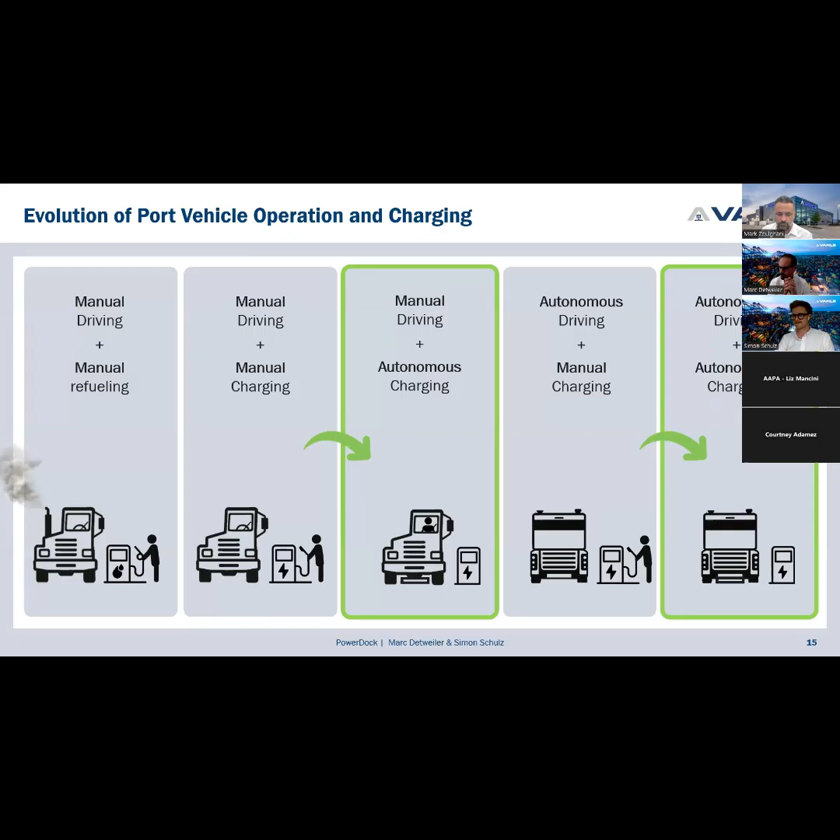So on the next slide, you see why we want to take this step, because manual charging can cause some problems. The problem is that when charging gets missed after a shift change, the vehicle isn't charged and is not ready to operate for the next shift. Very often, responsibility for charging is not clear.

With manual charging, we don't have a chance to make a so-called opportunity charging - in small idle periods or breaks, it's not possible to get out of the vehicle, plug the CCS2 gun into the car quickly, and then get back in the truck. We want a solution ready for opportunity charging. The manual CCS1 or CCS2 charging is not ready for automation, and for sure the operational inefficiencies with manual charging disrupt workflows and increase labor demands.

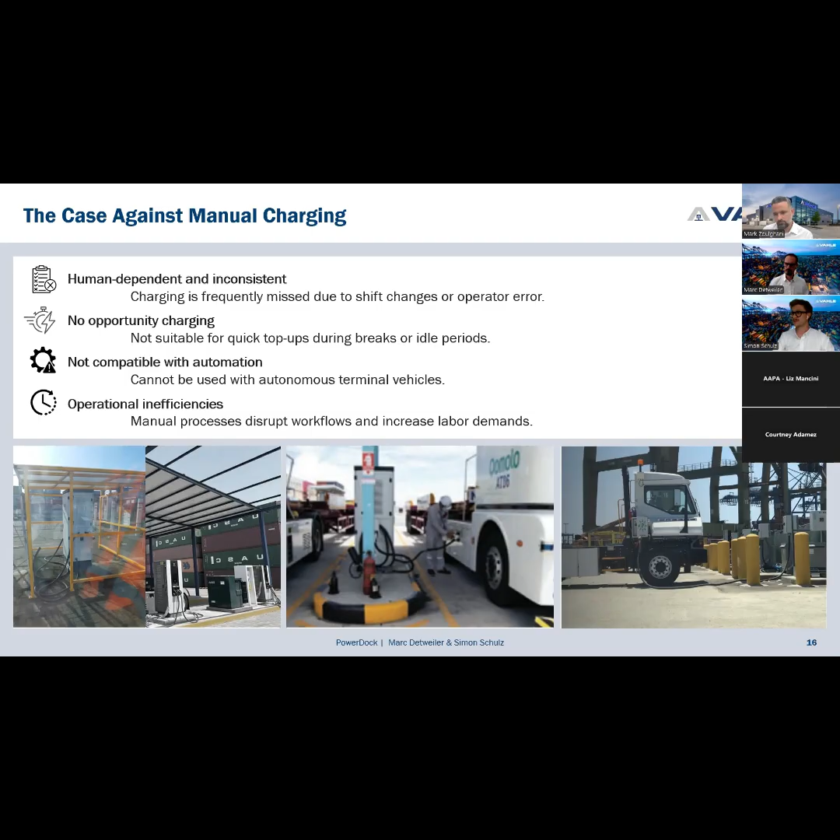On the next slide, I'm going to show you the system architecture of the system we are working on. From the very left, you can see number one, the DC charger, like any normal existing DC power charger. Number two, we have this tower where all our control units are housed. Number three, we have a base unit where we push a table up to charge a terminal truck or any other vehicle on the terminal through conductive contact - five conductive contacts.

On 4, you see wheel alignment guides. For the test phase, we need to use them just to be more precise on these pins. Then on number 5, there is a mobile unit.

I will show you later more detailed pictures of this receiver plate, which needs to be implemented on a terminal vehicle to pick up the power from the mobile unit. The grayed out things you see are clearly not our system, like the charger itself or the terminal truck, not delivered by us. The system which is in full color is numbers 2, 3, 4, and 5.

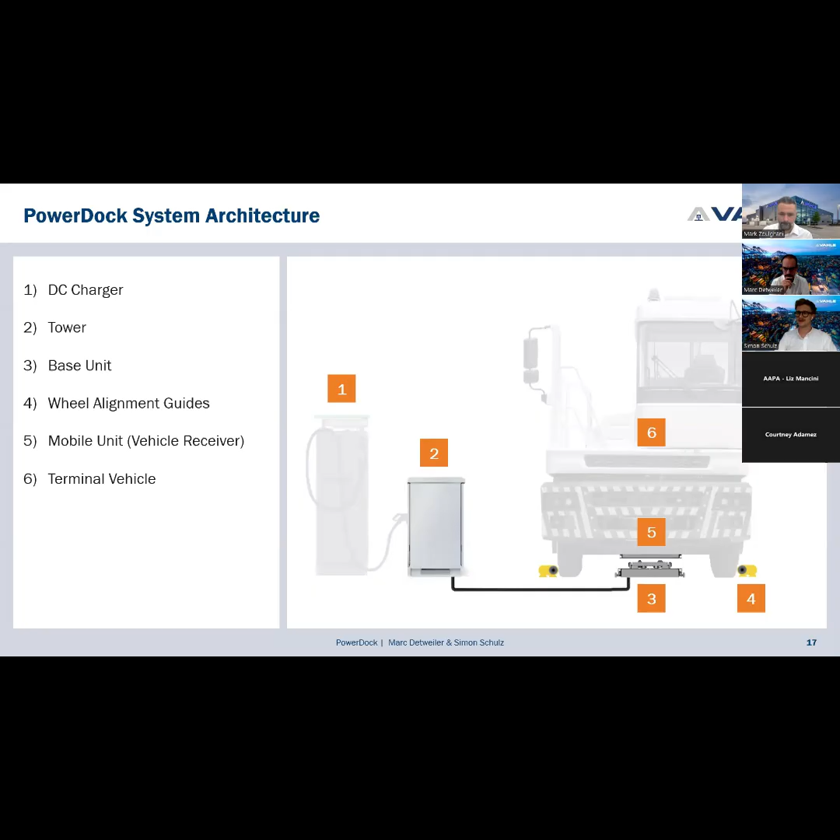On the next slide, I'm going to show you why we have chosen the charging option from the bottom. As we know, there are more systems on the market, not only in terminal operation but also in public transportation, where for example buses are charged from the top.

But for our system, we have seen that the bottom gives us universal compatibility, as more or less they are the same opportunities from the bottom - a terminal truck, a heavy forklift, an AGV, or a reach stacker are just having more or less the same technical circumstances from the bottom.

Also, because the design is very space efficient, I will talk later on a slide about it, that with this design from the bottom it should be possible in the future not only to have the charger on a specific parking lot, but also inside of a container aisle, for example. So also an argument for charging from the bottom is that we have the advantage that we can park the vehicle and just go over it again, implementing it into the daily process, and not have to start in a parking lot and go back to do any operation at the port.

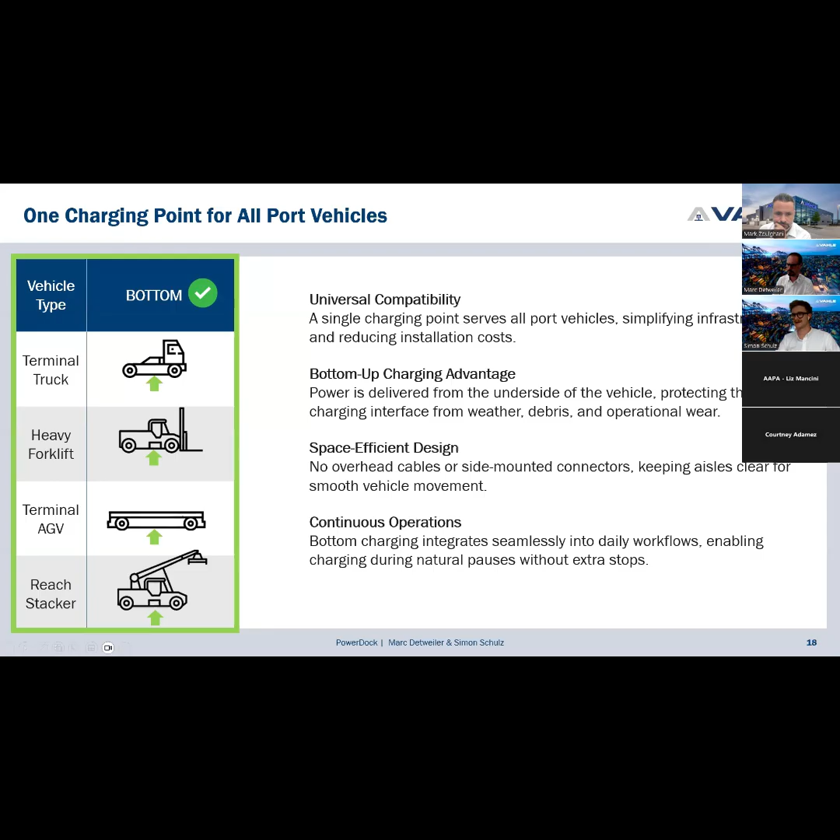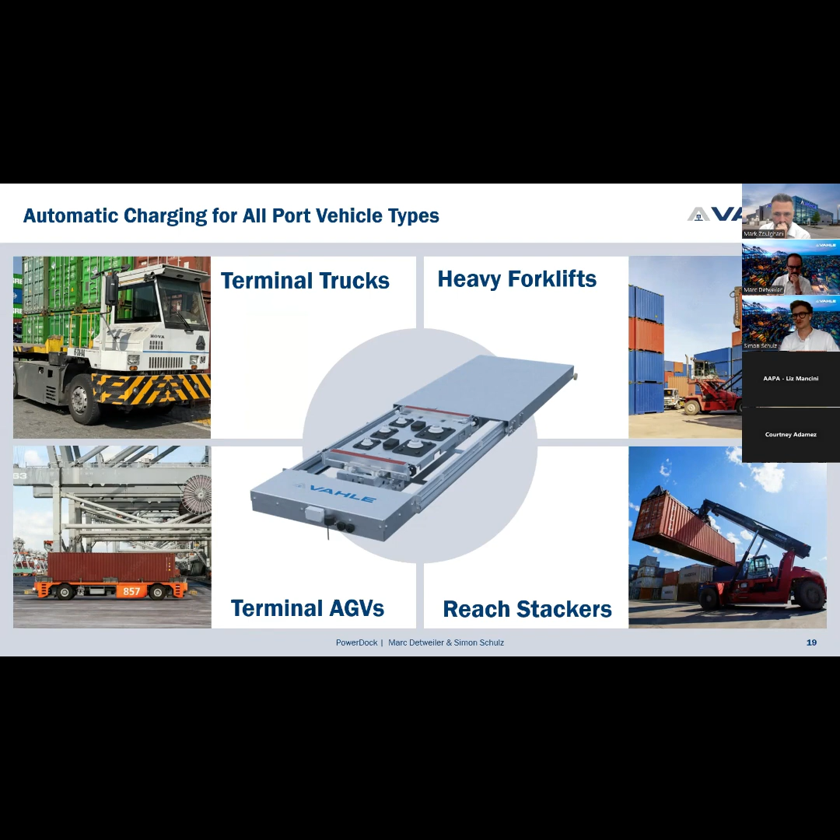Let's go to the next slide. There is a more detailed picture in the middle of the base unit. The initial idea was to create something which can be used for terminal trucks, heavy forklifts, AGVs, or reach stackers, all in one system. With this solution, with the PowerDock, this should be possible.

But as you have seen only renderings now, I'm going to show you a video from our latest prototype. Please let me know if you can see the video now. Yeah, it should work fine.

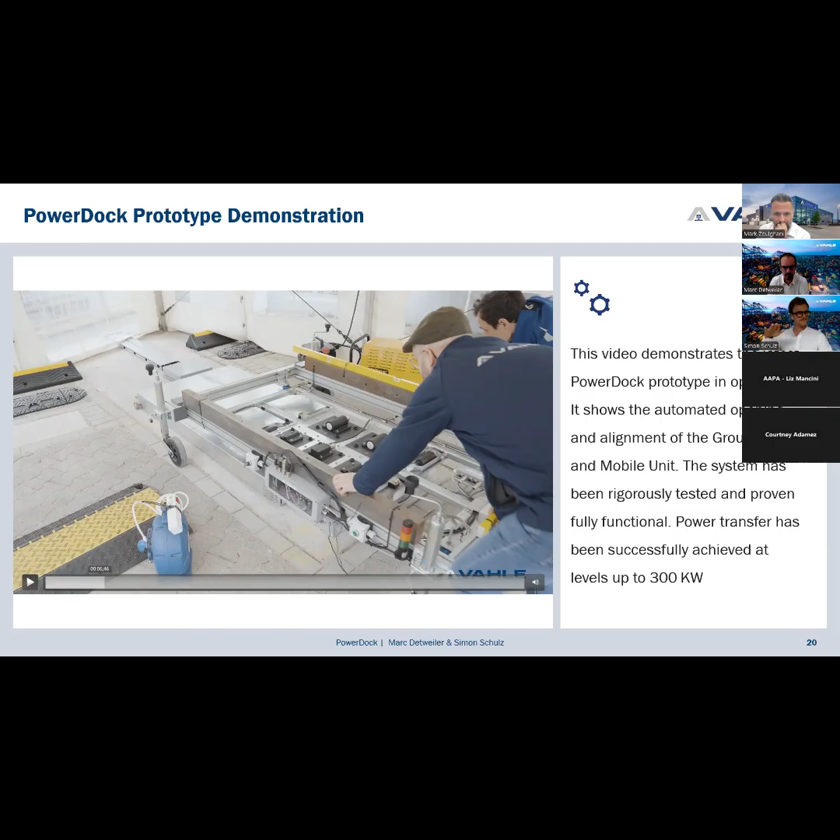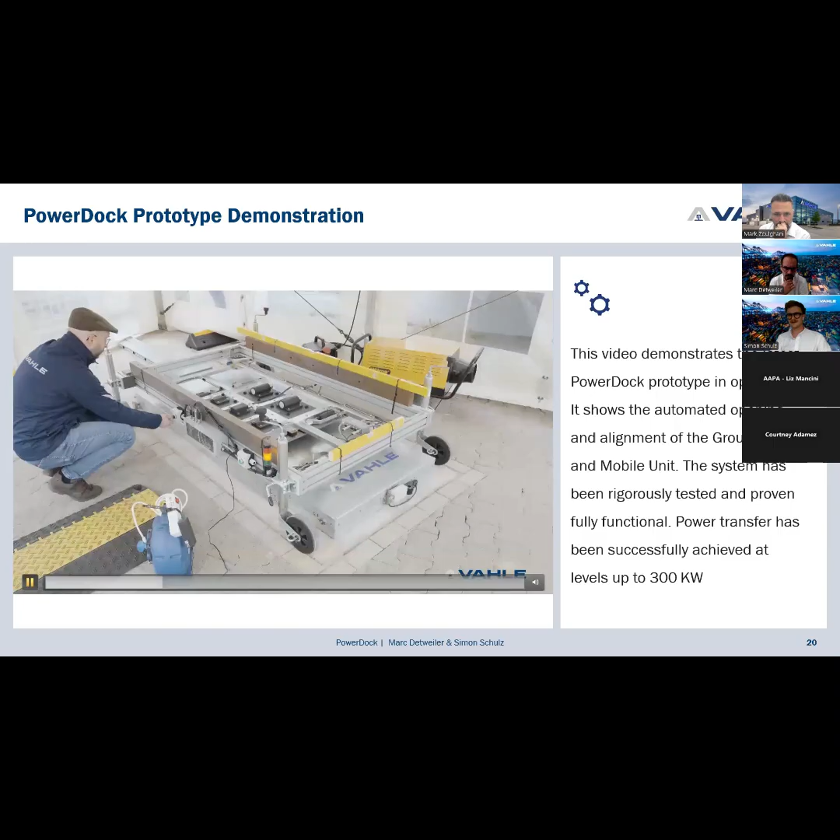I'm going to stop here just to explain this. The thing the guys are rolling inside our lab should simulate the truck. So they put the receiver unit on this wagon to drive over the base unit, and then you can see that both the base unit and the receiver unit have covers that open, and after that you can see that these massive pins are getting pushed up to the receiver plate from the bottom.

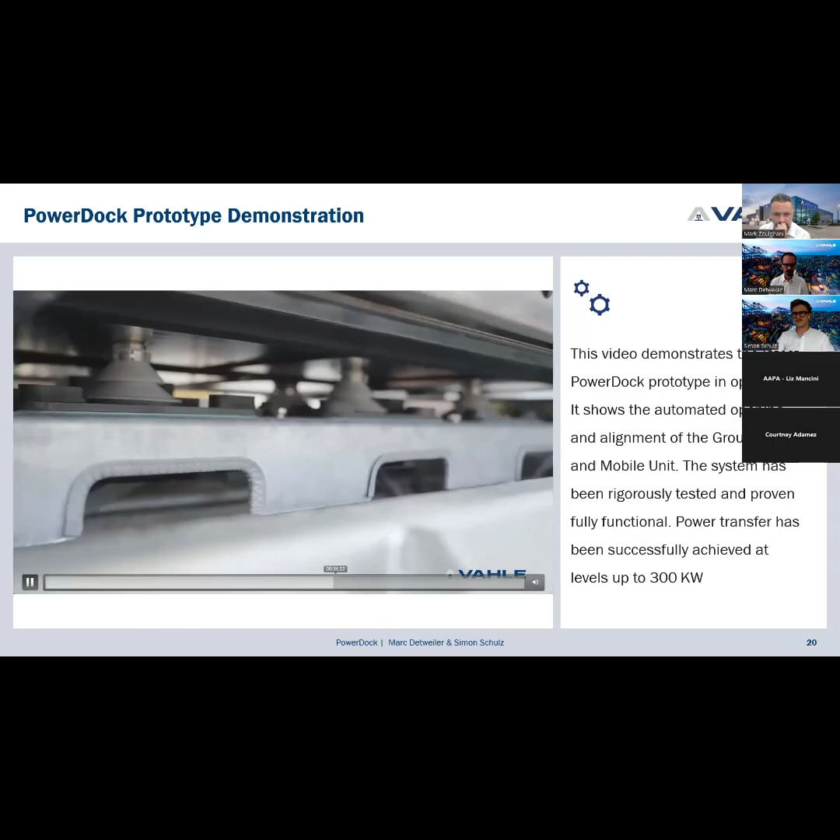After successful connection with the CCS2 protocol, we can transfer up to 300 kilowatts in peaks, 350 ampere. And as you could see, the guys - wait, I'll go back a little bit - they also shook the vehicle. So the system is very massive, but still we have very high tolerances, so it's really built for heavy duty use here.

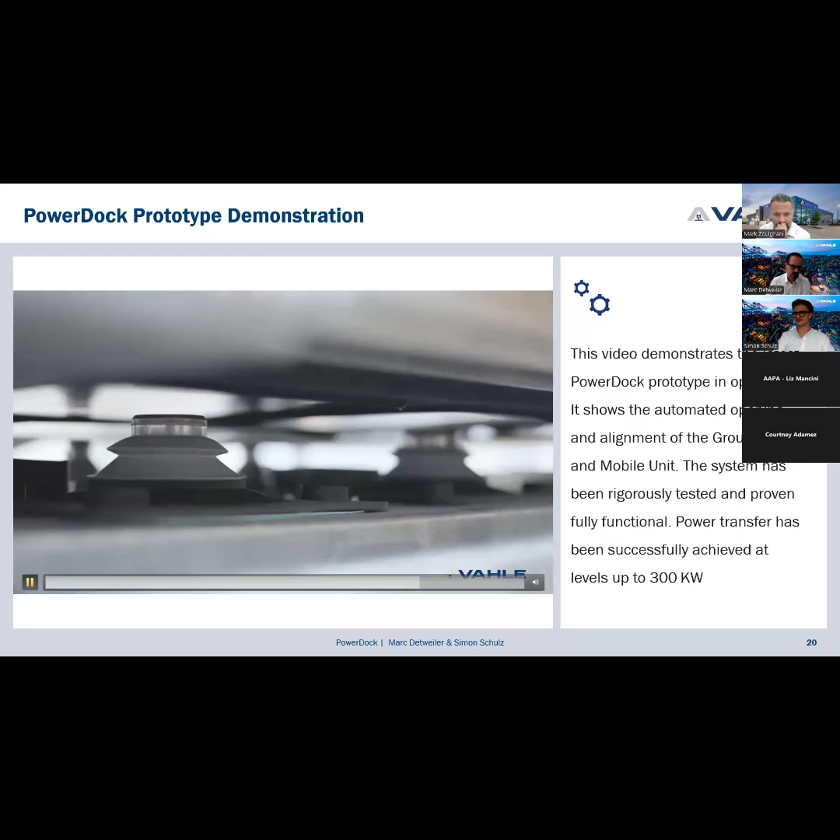Let me go to the next page, because we very often get this question: why did we use a conductive solution instead of an inductive solution here? And the arguments are clear.

Just to specify this one, we are not against inductive as Vahle itself. We're in the inductive business for decades, more in the intralogistics. So we know about inductive, but for this special use case, the conductive definitely wins, as we have a much more compact size for the same power transfer as an inductive one. So for an inductive system, the setup would be much bulkier than with the conductive ones.

Then also with the conductive ones, we have the opportunity to handle misalignments without any efficiency loss. The problem with inductive is that when you don't have the receiver plate exactly over the base unit, you have a massive efficiency loss. This we can handle with the conductive, as we'll show you on the next slide. We made these receiver plates with a certain size, so the parking doesn't have to be that precise.

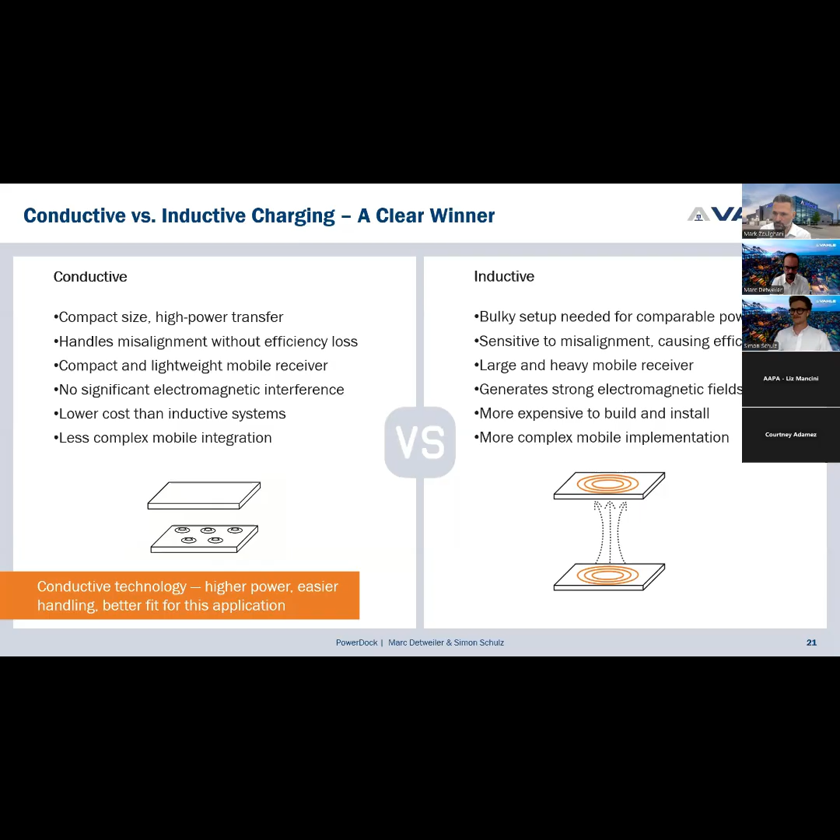Let me come to the next slide, where I'm going to show you that the system really works reliably even in harsh environments.

As I already said before, the parking tolerances are plus and minus 4 inches side to side, plus and minus 6 inches front to back, as the receiver plate you've just seen in the video is really massive. So the pin doesn't have to be exactly in the middle, as we know that with these heavy duty vehicles, it is impossible to park exactly in one position.

We also have angular tolerances, plus minus 2 degrees side to side, and also plus minus 2 degrees front to back. From the top, angle offset we also have 2 degrees. We know that with this kind of vehicle, the surface isn't always exactly straight, or they might be loaded heavier on one side than the other. So the system is built to really handle these tolerances, with offsets in three dimensions, plus in every dimension in the angle.

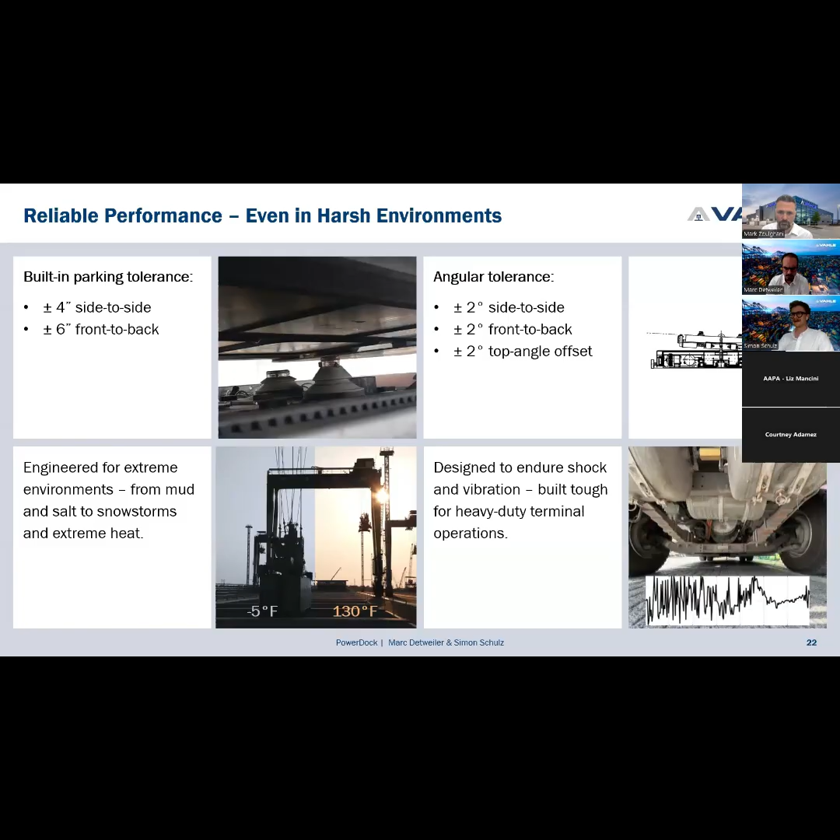Engineered for extreme environments, the system can really handle everything important in the port - salt, extreme heat, minus 5 degrees Fahrenheit up to plus 130 degrees Fahrenheit is not a problem for this solution. Also, as we have a receiver unit mounted on the bottom of the truck, with loading and unloading there are a lot of shocks and vibrations. Our engineers thought about everything so the system can handle these shocks and vibrations.

On the next slide, some specifications about the system. The table maximum height is 10 inches, minimum height when the table is lowered is 5 inches. You can see these big covers which will cover all the pins and will open when the vehicle is over it. On the bottom, performance specs: 300 kilowatt DC charging power, maximum current 300 ampere. We even tested for a short time a peak of 350 ampere at 1000 volt.

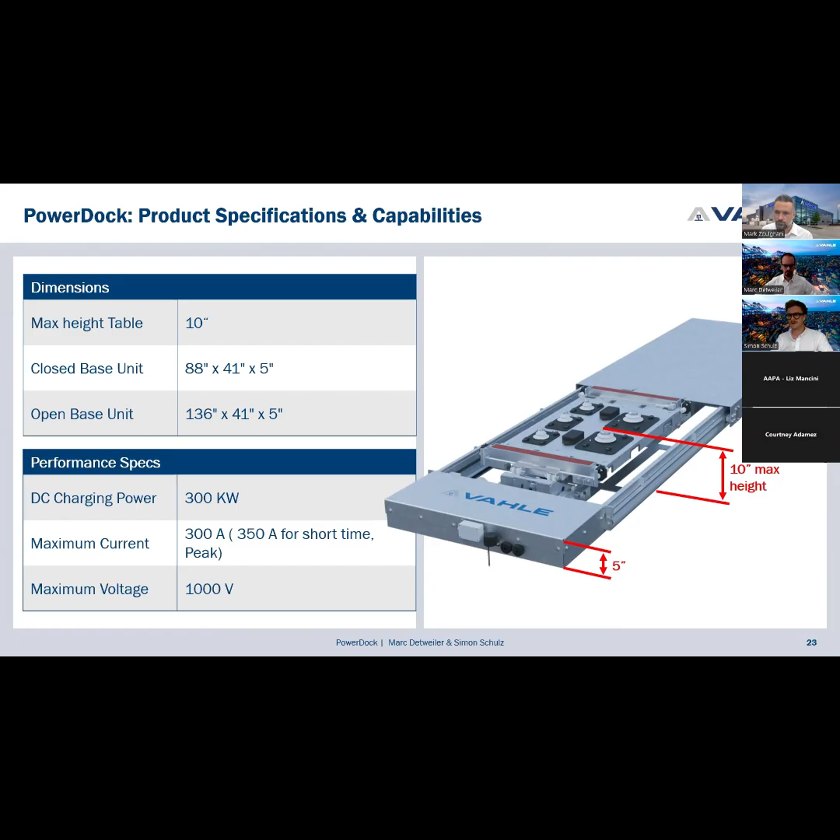On the next slide, I'm going to show you that we thought about all safety aspects for the system. Both the receiver unit and the base unit have covers installed, protecting the pins and the receiver unit from everything - from salt water, from water, from mud - and ensuring a reliable contact when the pins go up to the receiver unit.

Then there's the verified connection protocol. Even if the base unit is open and somebody would touch them, nothing would happen. In the CCS 1 and 2 protocol, it's specified that first there has to be a successful connection between the pins and the receiver unit. After the successful connection, data is transmitted over one of the pins, and after we have a successful data handshake, the vehicle tells the DC charger to switch on the power. So before that, there is no power on the pins, just to clarify.

Then there's secure vehicle lockout - when the base unit is in the up position, it's not possible for the vehicle to make any movement, just to protect the vehicle and charging pins from any damage. The system communicates with the car to keep everything safe. But even if something happens, the safety sensors will detect it, and if there's any water in the system or anything else happens, the system will always go into a safe shutdown and close the cover.

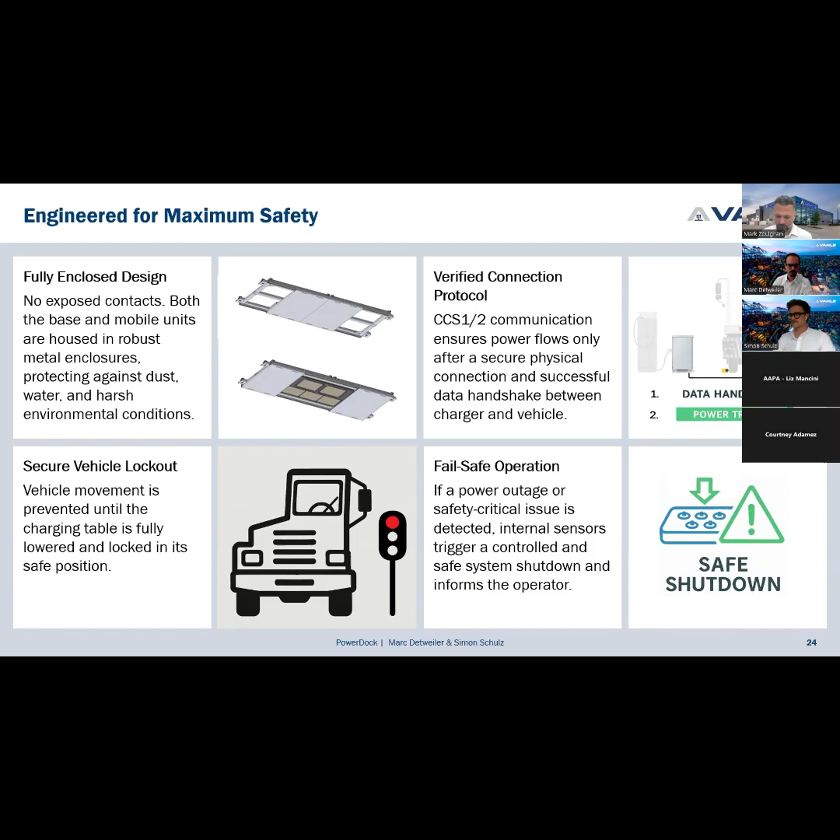On the next slide, I'm going to show you why we felt so comfortable making this innovation, as conductive power transmission, as Marc already explained, is our core business for over 110 years, also proven in ports worldwide powering ERTGs.

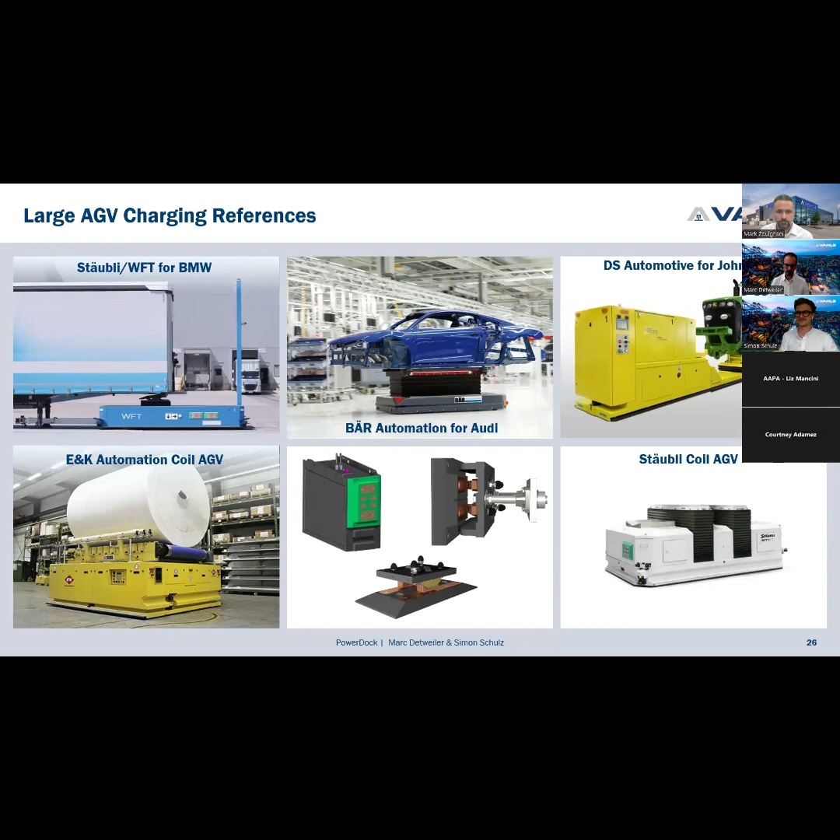For this, we are making a pilot in a port in Mexico by the end of this year, just to test the next prototype under real port conditions. During the operation, which we are making with an OEM terminal truck, we'll get real-time data, and then we can even more improve the system to have operational scale production. We tested it multiple times in our German lab, everything is functioning, and now by the end of this year, the next step is in the port.

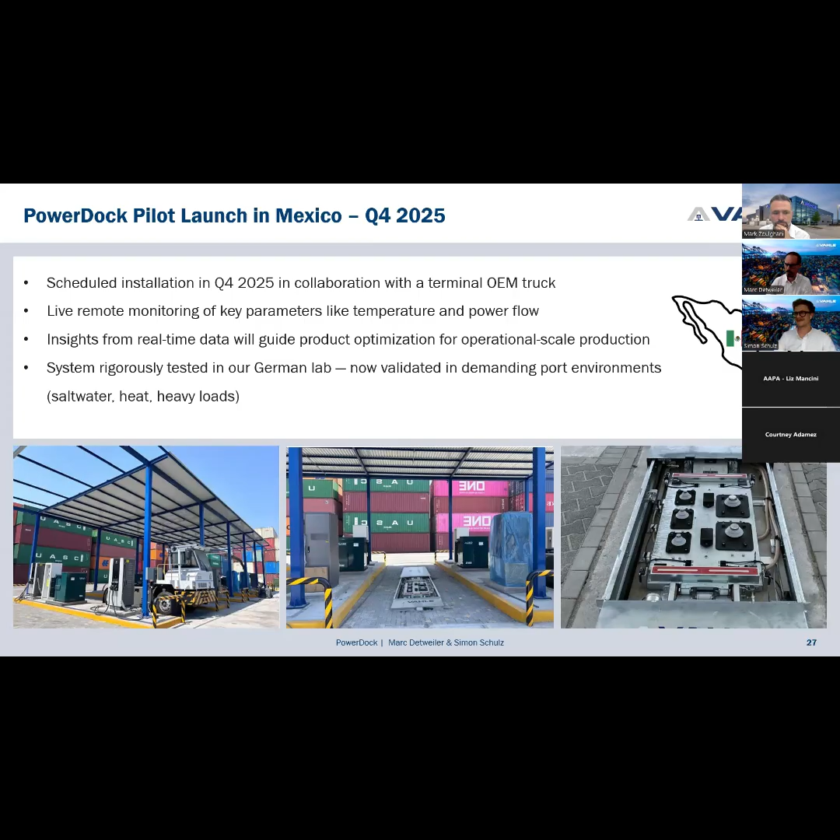This pilot will help us validate the concept, but for the ultimate version we have a bigger vision than these parking lots you can see. The idea is then in future to have seamless integration inside the container aisles. So the original idea was to have opportunity charging of trucks or other vehicles within the terminal, which makes it more ideal to integrate into the daily process. This is the main idea, and it gives us so many more opportunities in the future.

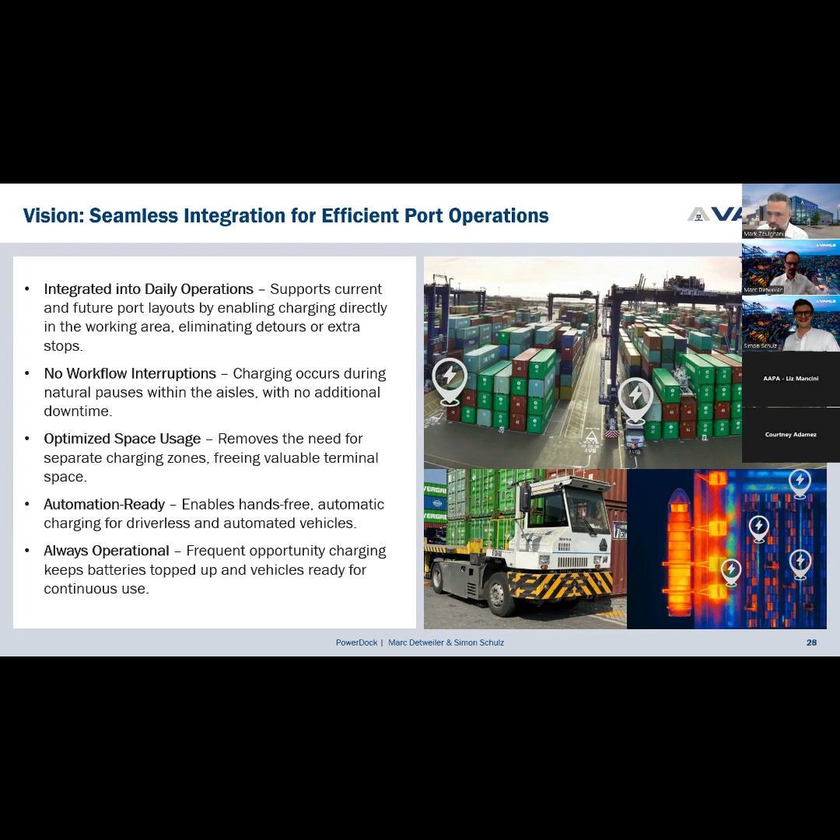Payal asked, it would be great to hear how your implementation goes in September. How are you guys going to announce that? Shall I? Absolutely, go on Simon. It would be great. Absolutely.

At first, for sure, we will handle it internally. Our whole development team and engineers are involved just to track all the data during charging, all the possible mistakes which can happen. After we have a successful proof of concept, we won't hide this information. We will let anybody know who is interested in the system, or to try a second test pilot, as there is actually one more prototype available, right Marc?

Yes, that is absolutely correct, we have still one additional prototype in Germany that we want to equip, hopefully soon. There's also some other topics in Europe where we're trying to have a pilot with a nameless brand of an OEM, but this is on a local facility where we move on with the test. So it's not a port, it's a closed facility, but we're trying to have real application knowledge close to the German headquarters.